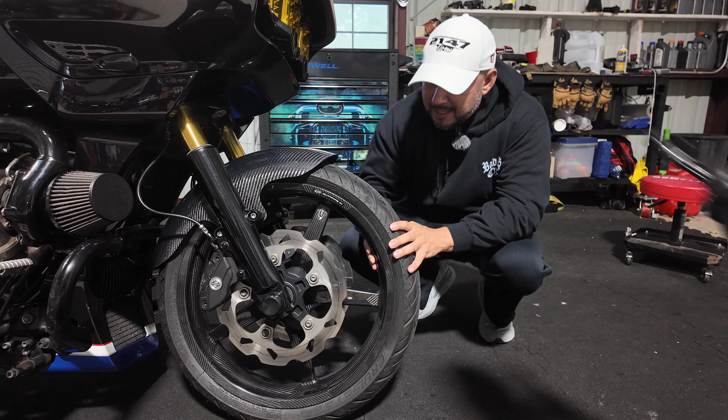Because there's a lot of people that have YouTube channels. Don't listen to those people. They've never had carbon fiber wheels. They don't know what they're talking about.

The reason I'm able to push that kind of power, before I go any further, is simply because I have a boost controller. Because Trask Performance built my engine, they gave me a boost controller. This engine is running on 8 pounds of boost all the time, but I'm able to pump it up to 15 pounds of boost.

So I have my dyno sheet here, and I'm gonna show you this throughout the video, but let me just finish explaining things to you. By the way, that's the first time I'm ever showing you all the dyno on this motorcycle, because I wanted to make sure it was fully reliable, and after 4 years and 40,000 miles or so riding it, it is, in my opinion.

So at 8 pounds, this motorcycle is pushing, well, you know what, let me just show you the dyno sheet. Camera woman, my wife, thank you, stay right there. But this is my dyno sheet.

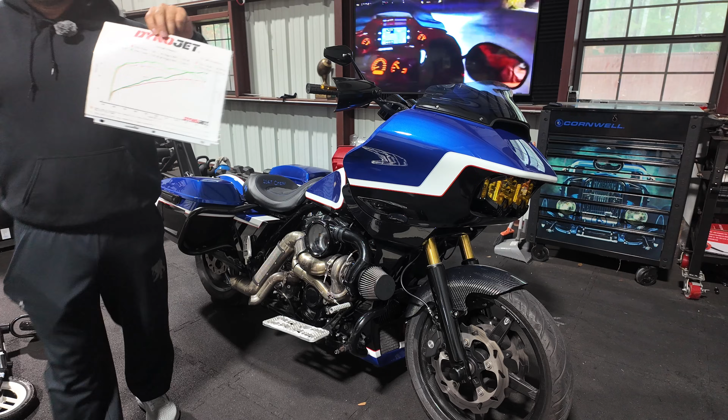So at 8 pounds of boost, and this was taken with 91 octane, it's pushing 183 horsepower and 185 foot-pounds of torque. That's what it's pushing right there.

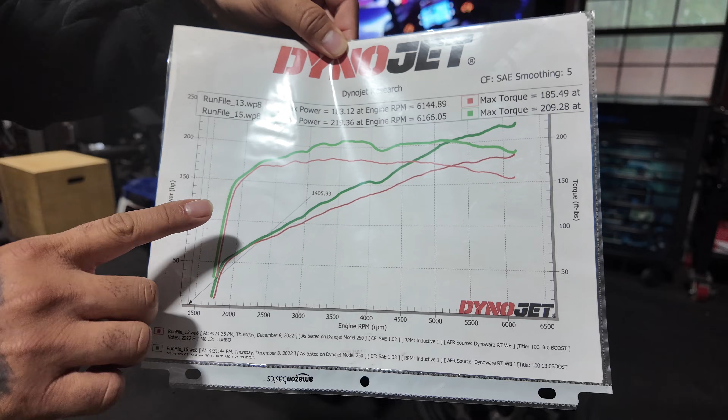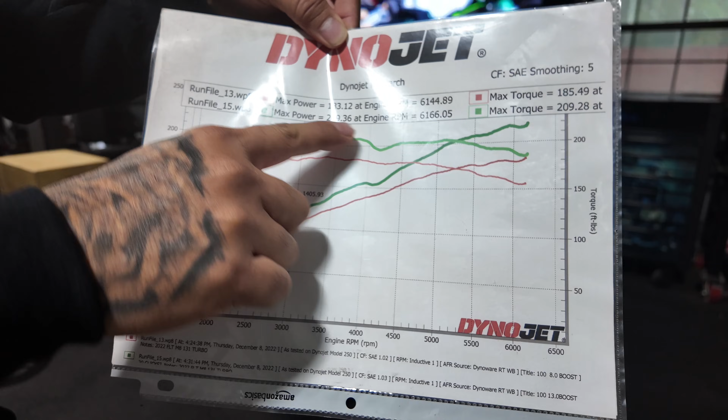Now, that's at 8 pounds of boost. But this graph here shows at 13 pounds of boost, it's showing 220 horsepower, and I'm also pushing 210 torque at the wheel at 13 pounds of boost.

So for the first time ever, I'm showing you all this dyno sheet, and I've had it for a good hot minute. So again, let's just break this down.

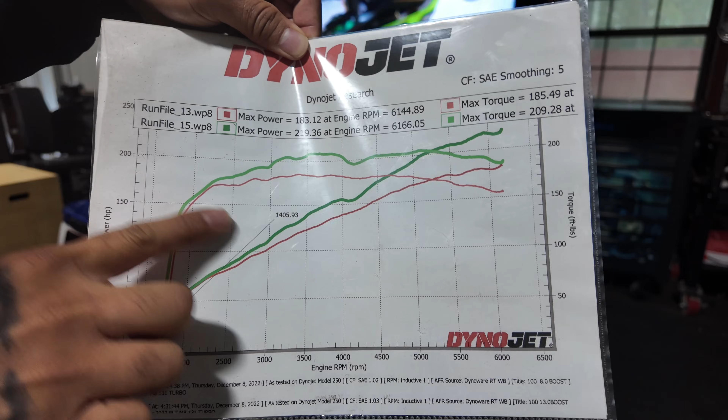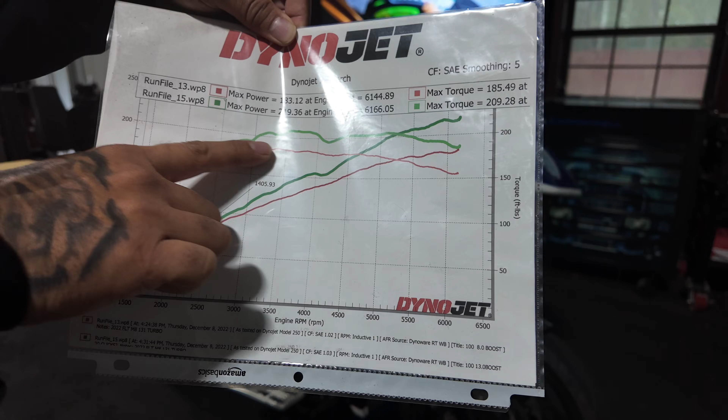So at 8 pounds, worst case scenario, at 3,000 RPM, I'm pushing like 165, 170 torque. And then at 13 pounds, pushing a little bit more, like 190 foot-pounds of torque there. So that's a lot. And then as it goes, that's where we get almost up to the 210.

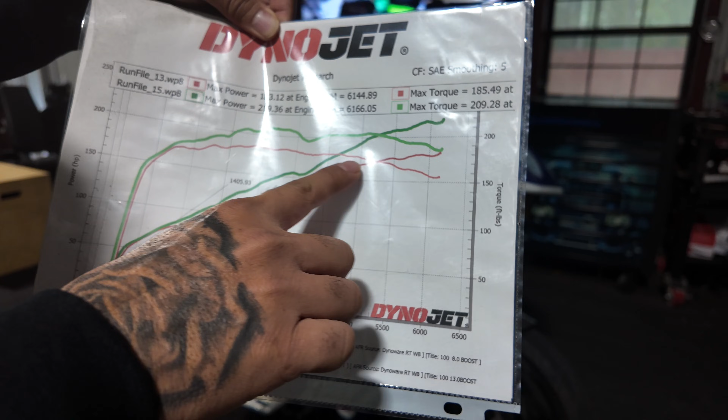And then down here, that's where we're at, which is about 3,500 RPM. We are, yeah, about 190, kind of across the 185, I suppose, across the chart there.

So now, you guys are like, hey, that's cool, this says 219.36 horsepower, and I'm saying 230. Well, that's because when I bump it out from 13 pounds of boost to 14 and a half or 15 pounds of boost, that's where I get the 230.

And on occasion, I get up to 245, even 250. But the catch is this: when I go up that much in boost, I have to put half VP 109 race fuel and half 93 octane in the tank.

With 2.5 gallons of fuel, you're able to get this power. On the daily at 93 octane, I keep it at 8 pounds of boost, but more than likely I can get away with 9 or 10 pounds of boost on pump gas. It's not recommended, but I still do it anyways, and I haven't had any issues with this motorcycle. That's where it's pushing, shy of 195, 205, 200 horsepower, depending on the humidity here in Houston or the elevation where I'm at.

Trask Performance will tell you to keep it at 8 pounds of boost on 93 octane, and that's what you get. But I crank it up half a pound, a quarter pound at a time, and I have the ThunderMax tuner that auto adjusts the system. It takes probably 10, 20 miles of riding pretty aggressively to pump up the boost a little bit, just to play with it. I've done this throughout the years, and I can pump it up to 10 pounds, where I have around 200 horsepower, 195 to 200 at the rear wheel. That's how I'm able to have this motorcycle reliably. This motorcycle can produce that much power, but it's not on all the time like that - normally I keep it in that power range. So that's how it's possible.

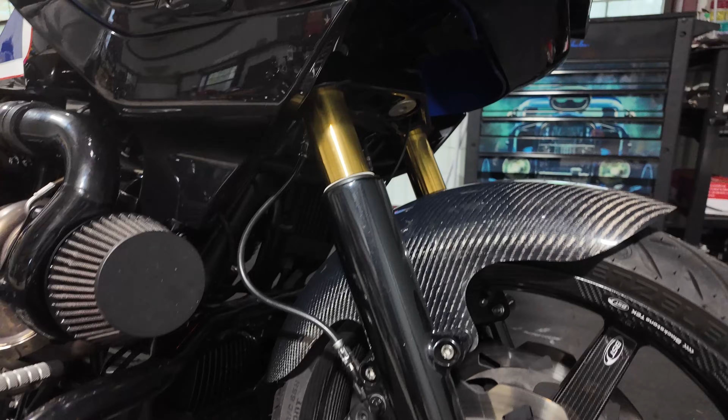And I have carbon fiber wheels, you all. I might make its own video, but I'll give you guys a sneak peek on the carbon fiber wheels here. The bike has 40 thousand miles, so these wheels have 36 and a half thousand miles on them, and they haven't cracked on me.

I've changed tires on them, probably 9 times already in the front, and probably 12, 13 or more on the rear. These BST carbon fiber wheels haven't leaked on me, they haven't cracked on me, and I've been over train tracks, dirt roads, rocky roads, different elevations, going fast, going slow, and they haven't cracked on me, haven't done anything.

I think I'm gonna make its own video, simply because there's a lot of people with YouTube channels who say they would want carbon fiber wheels, but they don't get them because after a certain amount of miles they have to get x-rayed to make sure they haven't cracked. I'm pretty sure that's the technical thing, I can't speak to that exactly, but don't listen to those people simply because they've never had carbon fiber wheels, and to a degree, they don't know what they're talking about, right?

Now in this channel, I've had them pretty much the whole time. These carbon fiber wheels have been on this motorcycle since it had 3,000 miles, before even the turbo, right? And they're able to handle that. They come with ceramic bearings as well.

So I just want to say, if you all are interested in getting yourself a set of BST carbon fiber wheels but you're worried that they might break or be brittle - I'm not a spokesman for BST or Trask Performance or anything like that, so to each their own, definitely do your homework. But from my personal experience, as you can see on all of my videos here, I haven't had one issue with these carbon fiber wheels, and I've had nothing but fun on them. So if there's people out there who say they would do carbon fiber wheels but haven't because they're scared they'll crack, dude, they may, I guess, but cast wheels also break when you hit a bump. So in my opinion, these carbon fiber wheels are the business.

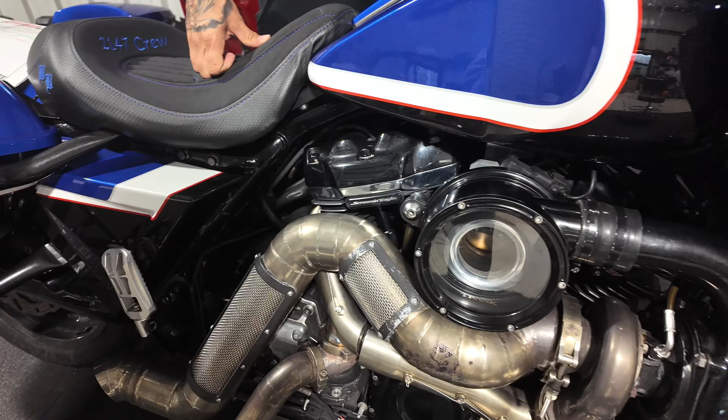I also have the Trask Performance floorboards on this motorcycle, pretty much aluminum, but man, I put them through their paces. I don't know if you can see some dragging there or not.

Now moving up here to the front, I have a full Arlen Ness front end. What I mean is I got the top triple tree, the bottom triple tree, the gold tubes, Öhlins suspension front and rear, ODI bars and ODI grips, all-around levers, and Arlen Ness mirrors here.

And this setup right here for me, when I sit down, if you could get this angle over here, beautiful camera woman. Oh, you want to get in on this?

What I mean about the comfort is the position that I'm in. I'm 5'8", but I have way longer legs than my torso. And as you can see here, buddy, don't scratch my paint. This is gonna wait out there. Sorry guys, but I can't scratch the paint.

Anyhow, so my position is comfortable. As you can see, my shoulders are here and it's dropping. If you could get right here so I can show them the angle, love. My shoulders are here, and as you can see, my arms are not parallel to my shoulder height, but they're dropped about 4 inches. And for me, this is such a comfortable ride.

And then when I put my feet up, this is what it looked like. Like this, guys, I can ride all day long. Literally, this is the only turbo bike that's done 1,600 miles in less than 24 hours, and 8 saddle sore 1000s, which is 1,000 miles in less than 24 hours. And I've done it in this position.

Uh-oh, somebody thought he was gonna get off, or he's gonna fall off. Yeah, I fall off. All right, do you wanna sit on? How about you stay on here for the rest of the video? There we go, we got a future rider here, 3-year-old stuntman, right? Yeah, bagger baby, what do we call you? Brody. Oh okay, we'll call you that.